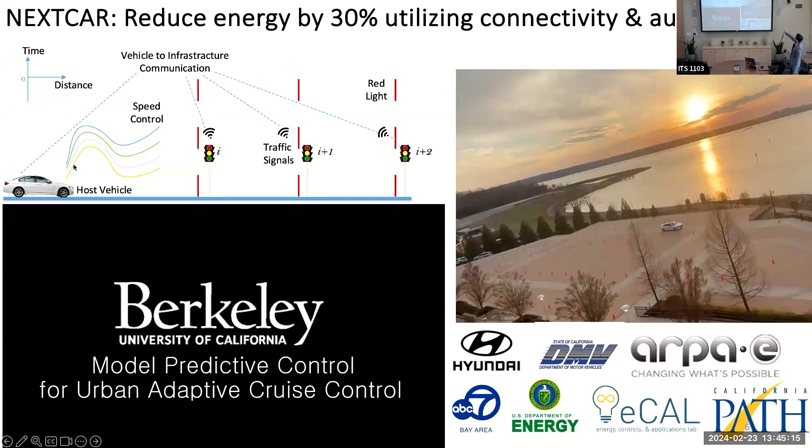So let me just mention a couple projects I won't discuss in detail because my research program has grown quite vast and I could talk about a lot of things. But I want to give you a sense of the breadth, and then we'll dive deep into some topics. So this project is sponsored by ARPA-E, the Advanced Research Projects Agency for Energy. And I bring it up because the goal is very relevant to our discussion. It's to reduce energy in vehicles by 30% by leveraging connectivity and autonomy. So connectivity means you have more information than you otherwise do. Autonomy means get rid of the driver's right foot, is my simple way of thinking about it.

So we have a number of demonstrations that we've done here, partnered with companies and so forth. The most illustrative demonstration is called eco-driving through signalized intersections. So the idea is as follows. If the intersections have connected to the traffic light controller some wireless communication, they can then transmit to the vehicles the signal phase and timing. That is, think of it as like a pedestrian crosswalk, where it gives you a countdown timer for how much longer you can pass through. So that, but wireless. And then the vehicle takes that information and then optimizes the speed trajectory to minimize energy consumption.

This isn't rocket science. You know what the optimal solution is to minimize energy? Ride a bicycle. But if you insist on driving a car from point A to point B, essentially it's drive at constant speed, right? If you're going to do so in some minimum amount of time, it's just you have these traffic lights that unfortunately make it more difficult. So that's essentially the game. And then let's see, this is also a video too. Let me just pass this forward.

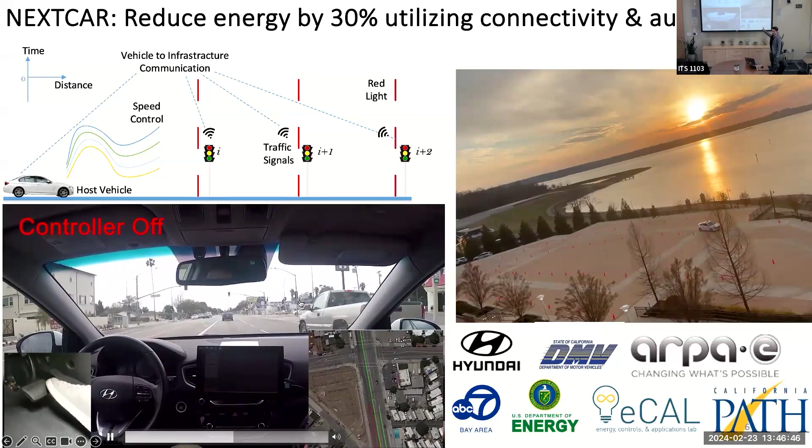So last year at the ARPA-E Summit, they asked us to do a demo of this, where we had participants at the ARPA-E Summit in Washington, D.C. come and ride in the car. So they often have people bring tech demos, but we were the flagship demonstration because it was like Disneyland. People could get in the car and experience it. And what we have here is our vehicle that's driving in an automated fashion.

And there's a virtual traffic light signal right up here. We couldn't bring a whole traffic light, of course, but you'll see the vehicle kind of pause. And then in the back seat, there was a virtual environment where the passenger could see the virtual signal. And actually, there were other vehicles that are going around in this loop.

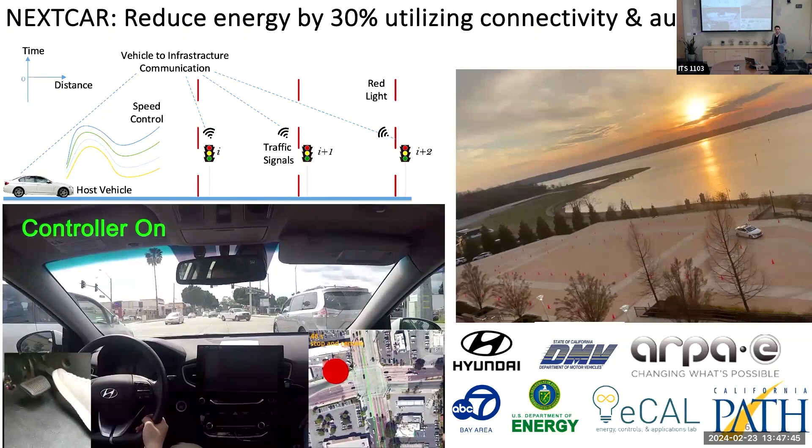So our students assembled this in like 3 weeks. They gave us a short period. They said, here's a bunch more money, just make it happen. 3 weeks, the car pauses and it goes. And then we want you to give several dozens of people, including government officials, rides in this thing so they could experience. UC students are amazing. So yeah, you can see a photo with all the students, Jennifer Granholm. So that was pretty cool.

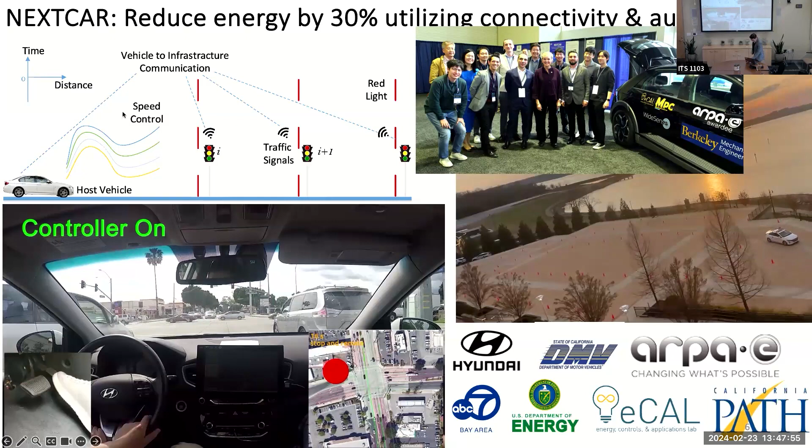Let me skip this and highlight this one. So this is a recent project from the UC Office of the President Climate Action Program. Some of you are probably familiar with this $100 million program that was stood up. So we partnered actually with Xinfan Lin here at UC Davis.

Any students at Xinfan?

No? Okay. And UC Merced and UC Santa Cruz. The question is, how do we evacuate communities in a world where there's 100% zero emission vehicles, where now the vehicle's fueling is much more coupled with a power infrastructure that could be more susceptible to outages in the event of an extreme event. So how do we think about evacuation planning? Could we do something about rethinking our infrastructure with some sort of backup generation or mobile power units?

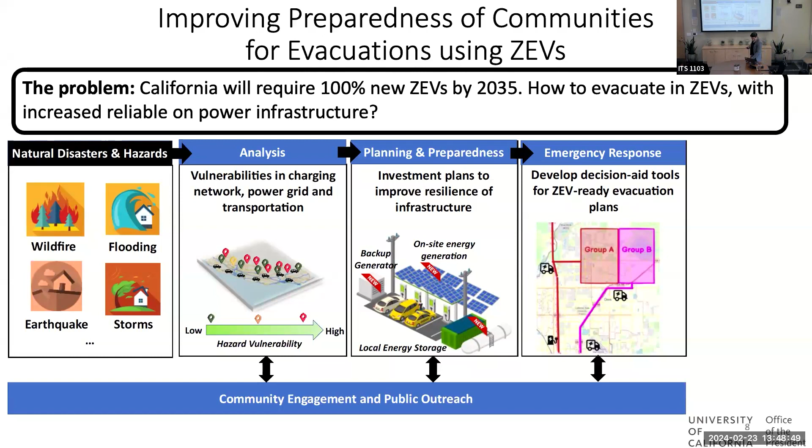So we're right in the middle of this project. But today, I'm going to give some background motivation for what I talk about in detail, which is SlrpEV, and I'll talk about innovative charging infrastructure options, namely Robochargers and battery swapping. So let me just dive right in. And first, I want to give context for why we care about all this. Like, what is the problem that we're interested in?

Xinfan just typed that they are online. Oh, they're online? Yeah. Okay, good. What's up, Xinfan?

So 51 billion. There's one number you remember from this presentation, it's 51B, because that is the tons of greenhouse gas emissions that are emitted annually, every single year. If we break that down into all these sectors, we can start to understand, if the goal is to send us to zero or net zero, what are the areas that are most important. Actually manufacturing, how we make stuff like cement, iron, and steel. Look how large that is.

We were talking about the importance of concrete before the seminar, right? So hugely influential for all the students in the room if you're still trying to identify research. The electricity sector, basically coal, to an extent natural gas, but getting rid of coal is important. Globally, transportation is only 16%.

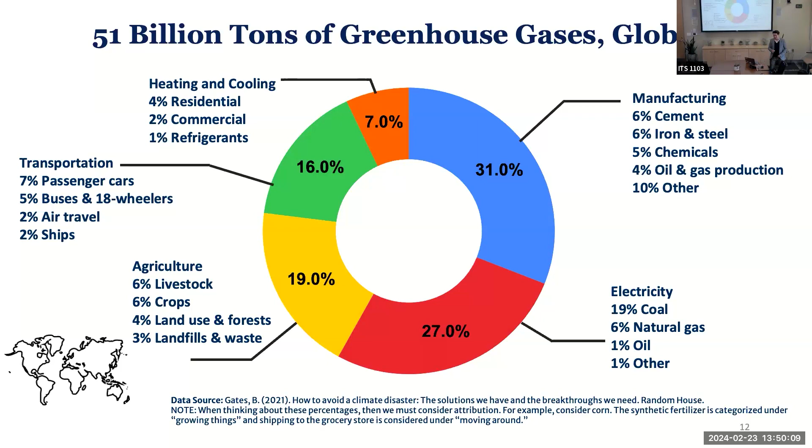Okay. But if we moved into more developed economies like California, where California is contributing 0.42 billion tons of greenhouse gas emissions, so about 1% of the world's greenhouse gas emissions is from within our state borders, okay? But in our developed economy, transportation is about 40%, and you can see how that breaks down into passenger vehicles, heavy-duty, aviation, et cetera. So this is why the state of California, in their policies, is being quite aggressive in trying to reduce the amount of greenhouse gas emissions in the transportation sector, because it is the biggest in the state.

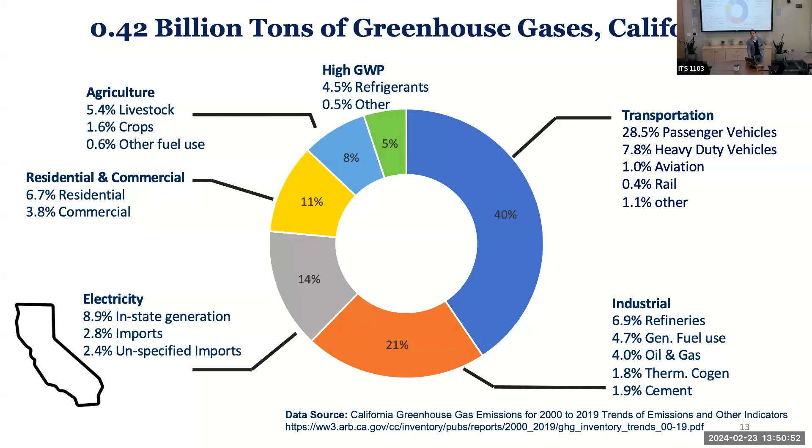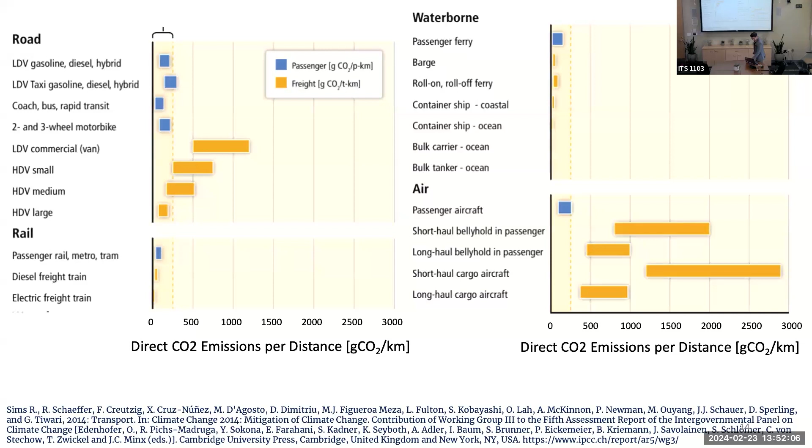All right. And I also want to talk about the duck curve. Anyone seen the duck curve before? Raise your hand. Probably half the audience, some that haven't. I love talking about the duck curve, so I'm glad to explain if you haven't seen it.

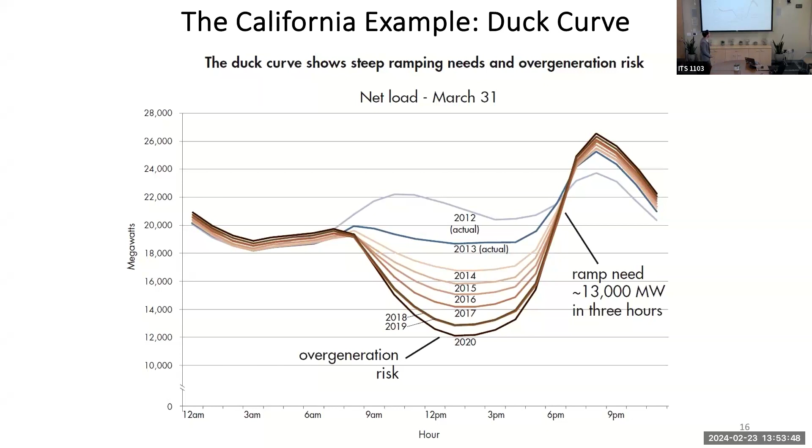For example, in this forecast of what might happen in 2020, thermal generators will need to ramp up 13,000 megawatts in 3 hours. The thing is that coal and nuclear, for example, as baseload generators, they don't change their power output quickly at all. But somehow the lights are on today, the year is 2024. So how are we doing this? We have achieved the goal of 33% renewables. We even surpassed it. And this is how it was achieved.

What happened between 2012 and now is the shale gas revolution. Natural gas is super cheap. We have much more natural gas, and that has been important to complement renewables, okay? Solar and natural gas are like PB&J for balancing the grid, right? Because natural gas can ramp up and down very quickly. But it's even more interesting than that.

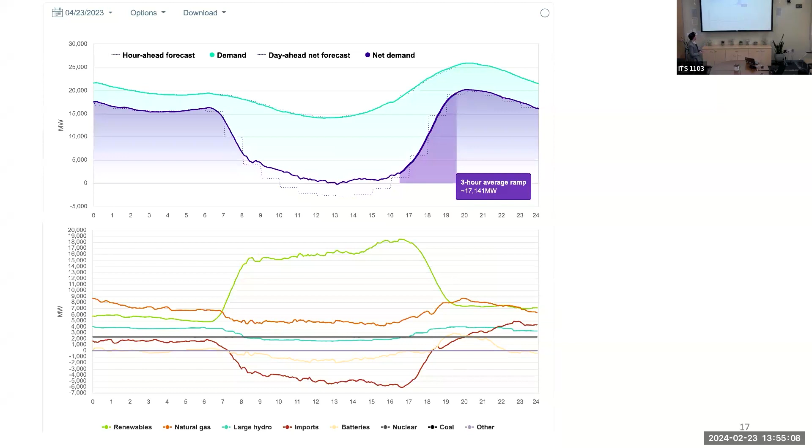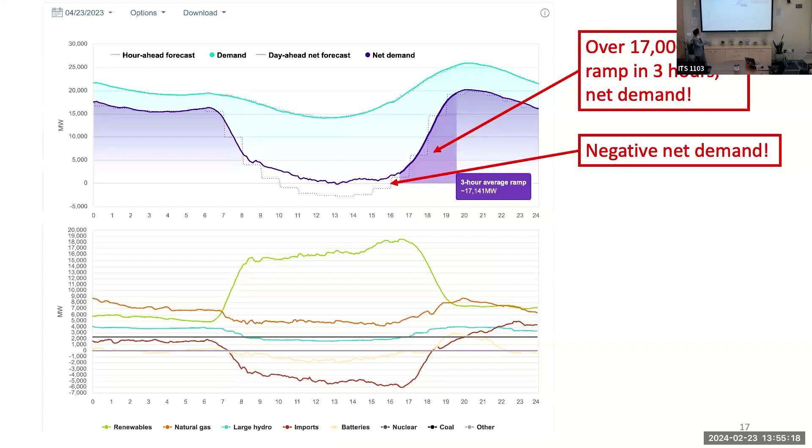So it turns out that in springtime in California, we have net negative demand, which means that we're generating more zero emissions energy than we can consume. And you can see that here. So if this weren't curtailed, you would have like a nice kind of diurnal bump here, but you can see it's like shaved off. We're literally curtailing, reducing the output of solar that we could otherwise generate because there's not enough demand in that moment.

Right? And here, we're basically exporting as much energy as possible and charging up batteries to the extent that they exist in California, and it's still not enough, right? In California, exporting energy is very rare. We are generally a net importer of energy, okay?

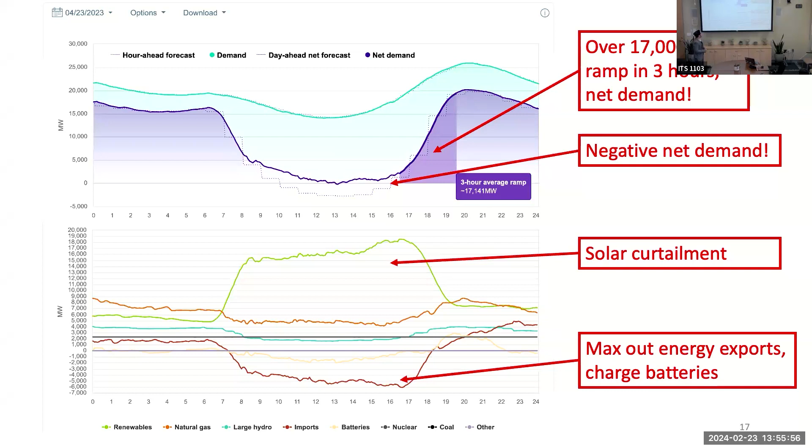Now, many of you are interested in transportation, so let's now throw electrifying the transportation sector on top of this. Okay, so we have this ramp in the evening, and now we're going to say, okay, let's electrify all vehicles. But the problem is the natural behavior is you go somewhere for work, you come home, you plug in, and note the charging would start when this ramp is occurring. Literally the worst time. It'll exacerbate the ramp, because of the natural behavior here.

So the key idea is, okay, if we can get some sort of flexibility in how these are controlled, then we can help balance this out. And there's also an emissions impact here because it turns out that the evening is the time of day that is worse in terms of total emissions on the grid, right? So if you're going to charge the vehicle, in terms of total emissions from electricity generation, the evening is the worst time. I felt a little bit bad because I charged up my EV and prepped to come here. I plugged it in at 8 p.m.

And I was like, not the best time to charge my vehicle. If I had done it in the middle of the day yesterday, that would have been better in terms of average emissions on the grid, but there it is.

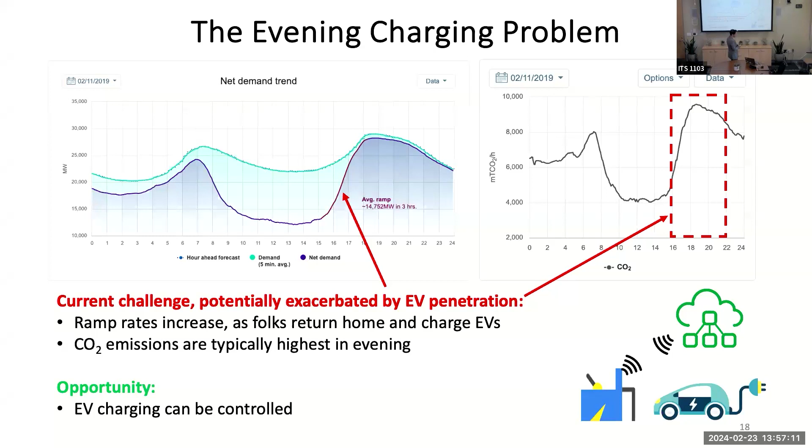Okay, so, behavior can help change this. And here's what I want people in California to do if possible, if I could control behavior. I want you to leave home with 30% charge in your EV. Anyone leave home with 30% charge in your phone? No? Yeah. Yeah, I do that too. I mean, you can charge at work, right? Like, do you guys have plugs at your desk? Yeah, you got plugs at your desk, right?

What if you had a plug for your car at work? And then you can charge in this time where emissions are least. And then when you come home, you're at 90%. You don't need to plug in at home. By the way, if it's your phone, the workplace is going to pay for it, right? Who pays for charging your EV? We'll get to that in a moment.

And it skews towards, like, me, college educated, white, I own my own place. It's a condo, actually, it's not a single family home, so I got those issues. But how do we provide transportation electrification to the second 50%? It's not happening naturally. And part of that I really want to emphasize is getting charging infrastructure to people's homes is super difficult. So this comes from another study from one of the national labs that I think is absolutely incredible.

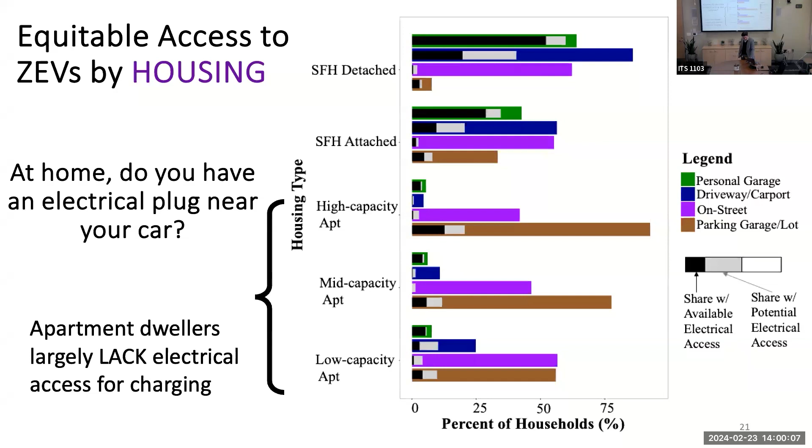And what this graph is showing is basically the black as a proportion of the colored bar is those that have electrical access. And then the gray is like, okay, if you did some sort of upgrade, then maybe you could get access. So there's a huge amount of people that are left out that don't have the easy convenience of charging at home. So that really leads towards SlrpEV, Smart Learning Research Pilot for EV Charging Stations. This is collaborative work with students Teng Zeng, Bertrand Travacca, Sangjae Bae, listed here in order. Tuba Ozturk is right here, and then Hassan Obiad.

So here's the goal: we're trying to create the next generation of workplace and public charging infrastructure to address all those problems that I just talked about. We want to decrease emissions. We need this to be economic for the facility operator, and we want this to be affordable to the EV drivers. And the key thing to remember is, there are many EV charging pilots across the country, across the world. Why is this one different? This one is different because we're not just optimizing power, the charging schedule, but we're optimizing the price of EV charging service by learning their preferences. Okay, that's the key. So humans are in the loop, and I'll explain in more detail.

So I think of this as a cyber, physical, and human system. Let me describe the cyber and physical components first. So physically, we have 8 level 2, so 6.6 kilowatt EV chargers, similar power to the ones on the backside here. There's 8 of them in a garage on the UC Berkeley campus. And the cyber infrastructure, let me describe it by how a user experiences it. So you park here, you scan a QR code, and that opens a browser on your phone, and you log into our system.

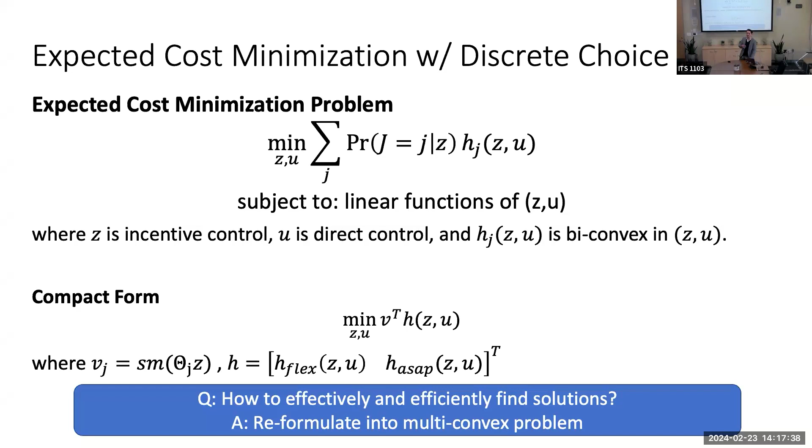Okay, I'm going to move on and talk about alternative ways to bring charging to vehicles with different forms of infrastructure. So I'll briefly talk about Robochargers. This is collaborative work with Yizhu and Teng Zhang and Zaid Ali Bokis, who's at Total Energies that helps support this project. So why am I talking about Robochargers? Here's the thing I've realized with SlrpEV is that there's huge challenges with fixed infrastructure.

First, people overstay, meaning they might plug in, start charging, but they stay parked there for many hours after they're done charging, thereby blocking the infrastructure for others, right? So that decreases utilization. The electrical infrastructure is really expensive.

While I was driving here, I was listening to a podcast about distribution transformers, and how there's a 2-year backlog. So if we want to build a lot of charging stations right here where we need a new transformer, apparently we won't be able to even get it going until 2 years from now because of supply chain. So can we get around the need for that? There's permitting, there's scalability.

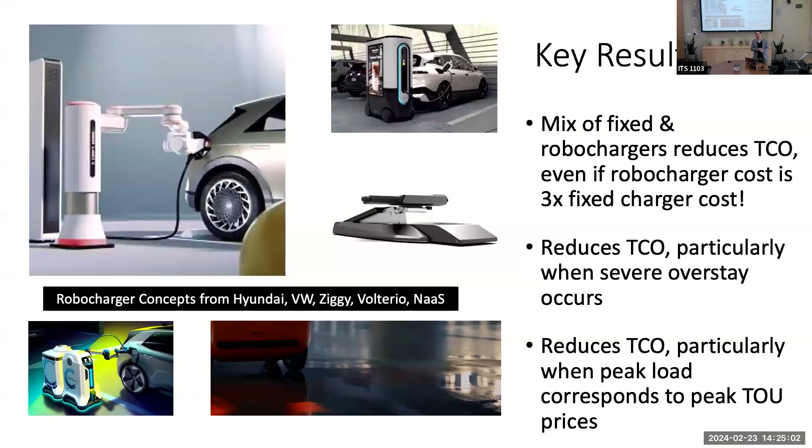Ideas like that are really good, right? I describe it as robo, but things around this area are what we need, the way you asked me to highlight challenges. So innovative solutions like that. If we can get rid of the human element, because of the cost concerns, that's a consideration as well. Let me move forward and go into battery swapping.

Gil Tal's not here. I know this, he gets excited about this. But he'll watch the recording, so he'll get to enjoy it later.

So, battery swapping. I want to focus on this. I showed this carbon emissions intensity, and at least for road transport, the most emissive mode is heavy duty freight movement, right? If we can decarbonize, make zero emissions one of those, it has an order of magnitude impact.

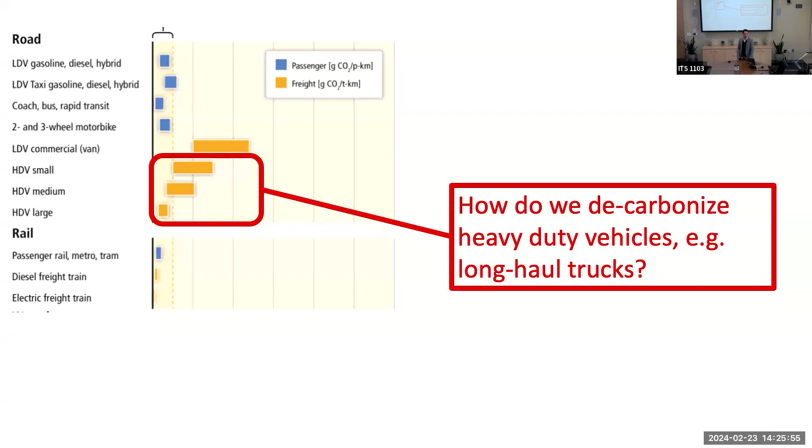Now, suppose I ask the question as simply as this: what is the fueling or powertrain option for heavy duty trucks that minimizes emissions? And I don't worry about the logistics of truck movement. So the answer is battery electric, conclusively, simply because of the energy conversion losses of creating hydrogen, even if we do so with green energy.

This actually was a figure from my colleague Nicolas Obrecht at Total, who looked at the carbon intensity of the electricity mix on grids. You can see this is annotated with different countries in Europe. The whole EU is about 200 grams of CO2 per kilowatt hour generated. France is super low carbon.

Anyone know why France is super low carbon in electricity? Yeah, they're heavily nuclear. Germany is much higher; although they started with the feed-in tariffs, they then had to rely on a lot of coal and gas. I think the worst European, it's not here, is Poland, which is dominant in coal.

So here you basically just have the conversion of generation of electricity to charging the trucks. But if you have to go through electrolysis, taking electricity, cracking H2O into H2 and O2, and then you take that H2 and put it through a fuel cell, you've got maybe a 45%, 40%, 35% conversion efficiency.

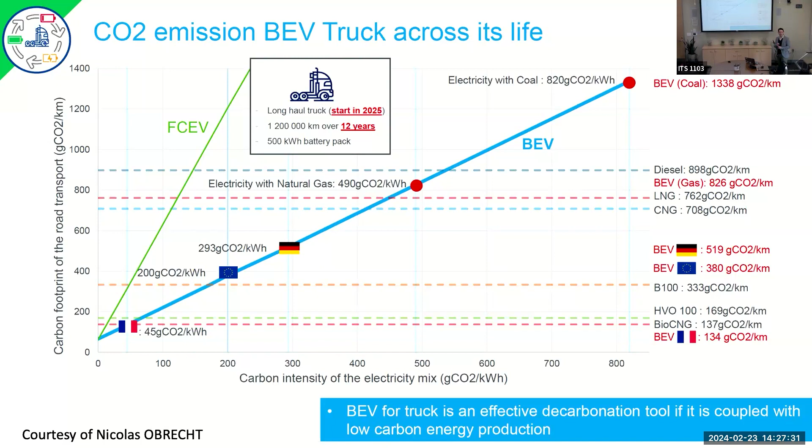It always loses, okay? Now, I'm not trying to go super hard against hydrogen and convince you battery electric is the silver bullet, but from an emissions point of view, it's clear that makes sense. The issue is range, right? That's the obvious issue you're probably thinking. So let's look at range for a sec.

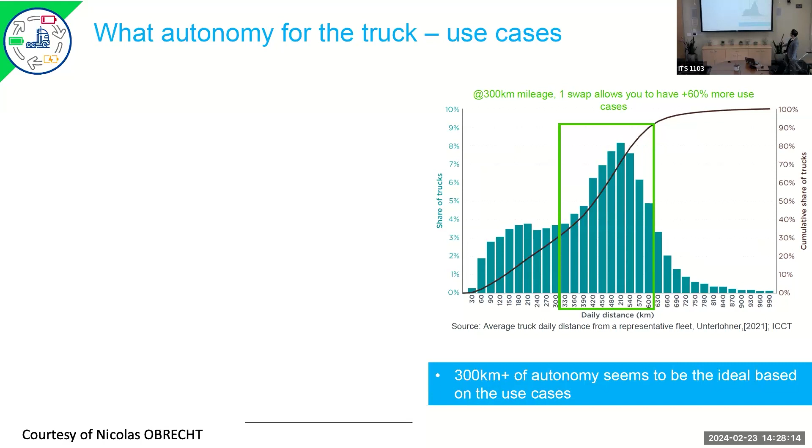Now, let's consider the idea that maybe you could swap the battery once during a day. This is showing, if I don't do a battery swap during the day, what percent can I decarbonize given the distance? They use the word autonomy; this is a language translation thing. And then if I do one swap per day, how much more of the trips can I cover? And if I do two swaps.

But at the same time, you have this facility with a whole bunch of batteries in it, and it's basically a battery storage system, which can then provide services in electricity markets. We talked about the duck curve, the need to absorb energy in the spring in the middle of the day. So you can sort of stack values, if you will.

So how would you operate such a thing? Because now you're providing a fueling type of service, and on the other side, you're participating in electricity markets. How would you operate all of this simultaneously? Could this make sense? Is there some scenario where it makes sense?

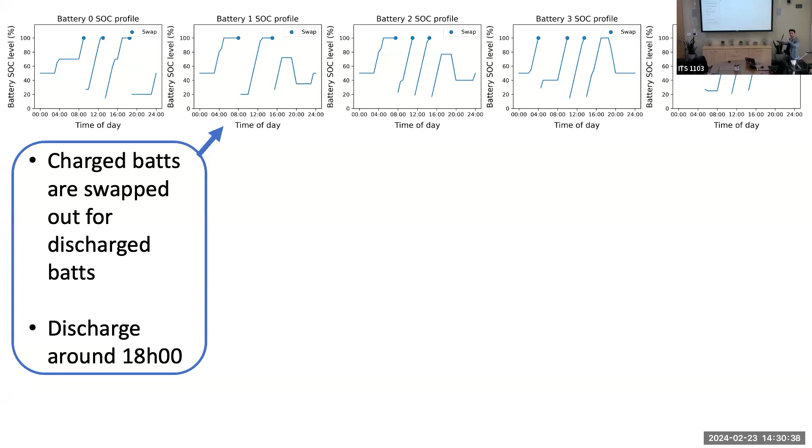This is actually a bay inside the swapping station. So you've got this battery, which could charge up, and then a truck comes and it swaps a discharged one, and then it charges back up, and so on and so forth. Meanwhile, at the end of the day, you can see it actually might discharge these batteries because there's some value in discharging to address this ramp issue that we talked about in the duck curve.

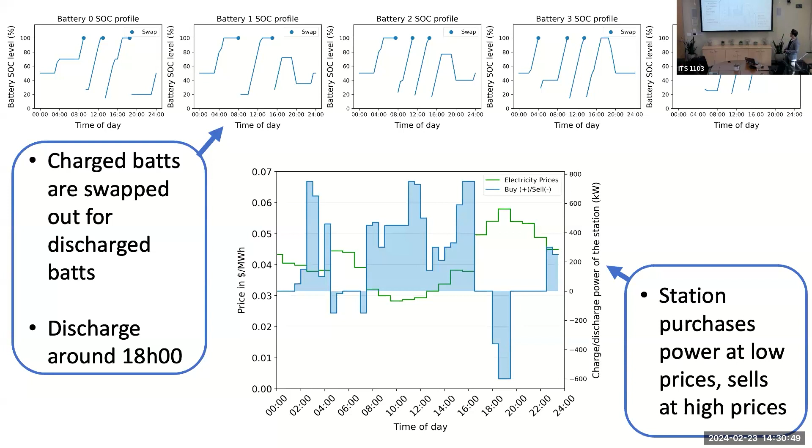So you can get this profile like this, where you can buy and sell electricity in the market, while in addition providing this swapping service. So just a flavor of some OR style problems here that combine electricity markets and transportation.

So I'll conclude here. Transportation in California is 40% of greenhouse gas emissions. There's equity and access challenges that get us thinking about some really nice intellectual challenges of how can we come up with innovative ideas. SlrpEV is one. We show that you can increase revenue by incorporating behavior to try to get flexibility. And then there's other ideas of charging infrastructure to help address issues with decarbonizing transportation.

I talked about Robochargers. I talked about battery swapping. We need a lot more of these innovative ideas that can help crack these difficult problems that I encourage you to think about. So with that, I'll stop.

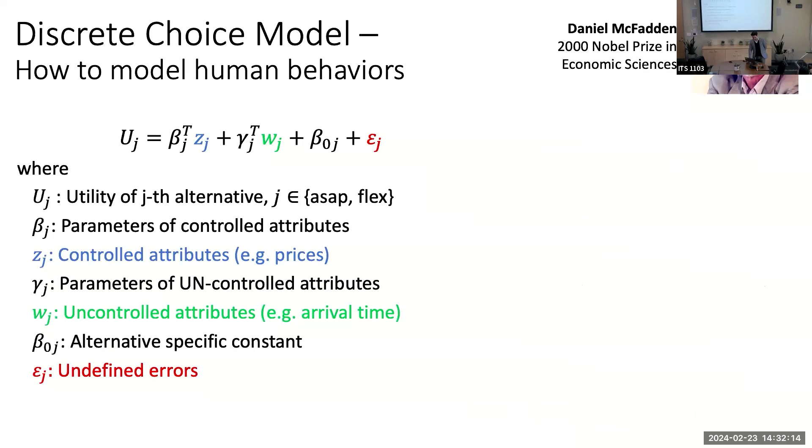And you can imagine that early EV adopters know a lot about batteries because they did a lot of research, but maybe the next quarter, like 75% of 50% of the population isn't going to know. Yeah, so let me repeat the question as I understood it: do we do anything to provide information to the participants on how to charge and improve their battery health? Namely, don't charge up to 100%. Yeah, or saying something like scheduled could be better for your battery health.

That's very interesting. The answer is we do not. We do not do anything in terms of informing them about their battery health. That's very interesting because if we did, that's maybe another signal that isn't strict price that might incentivize scheduled more. In particular, they may not need to charge to 100%, right? And if that reduces the charging time, we can get a little more flexibility. That's a really brilliant idea.

I'll tell you, we've got 279 unique users. I have all these anecdotes of people who literally just bought an EV last week and they don't have a way to charge it at home. And they're like, I know there's SlrpEV, and they sign up and then they contact me and they don't even know how to get the charger working, right? And to be fair, SlrpEV is a little more difficult to get working than normal because there's an app, and it's not like a Tesla supercharger or anything.

So it hits me that there's a big chunk of these users that are just new to this. And I think, how do we layer on information to them so they're not overloaded? Your idea is brilliant. I'd never thought about that. And I work a lot in batteries, and now I'm embarrassed. That's quite brilliant. Thank you.

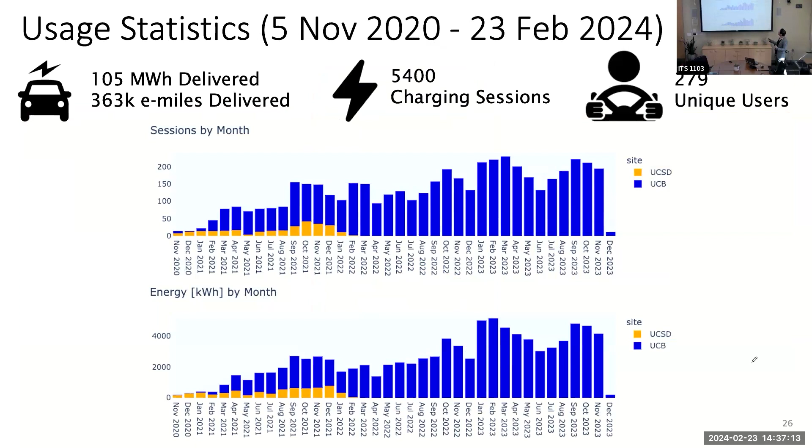So we have one power user. How many charging sessions do we have? Almost 500 of these are one person who has a Prius Prime plug-in. Oh, okay. And she arrives at like 5:30 and finishes at like 8. You know, and that's all she needs. And so basically that's all her.

And because she doesn't need much charge, optimizing doesn't make sense. If she picks the regular schedule, it'll do the same. Oh. So I think it's just anecdotal, a particular power user who happens to come in. Yeah. So this is all very interesting.

The fundamental thing that powers all of these is the arbitrage opportunity presented by the duck curve, right? And because that's there, you can invest capital now to get operational savings later. But those obviously compete against each other for that arbitrage opportunity. And now we live in a high interest rate environment. What are your thoughts on both the saturation and interest rate effects on whether these things are viable? Oh man, you gave me a whole macroeconomics question.

So the first thing I'll say is, here I'm fussing with shifting a little bit of power, doing arbitrage, like you're saying, between before 9 a.m. and after 9 a.m. It's not dramatic, right? Just getting people to charge at work is already putting the bulk of power in the middle of the day. You're mentioning the duck curve. Just getting them to charge in the middle of the day is getting them to charge at a time when the total emissions in the grid are least.

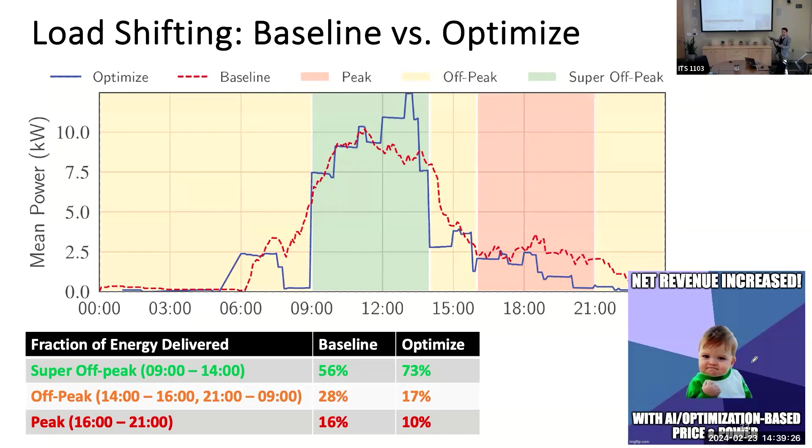And since you mentioned high interest rates, I think that does tie in with some other options. Some of these may be capital intensive. Some of these may be less capital intensive. We need other alternatives that have different risk profiles if you're trying to raise finance for infrastructure problems. This is almost more of a consumer electronics appliance type of solution as opposed to an installed infrastructure solution.

Yeah, I hope I somewhat addressed your question. Yeah, thank you. Cool. Hi, thank you for this interesting presentation.

I also have a question about the objective function in that program. You say it's to maximize revenue or profit. But wouldn't it make sense to be something more directly connected to welfare, like maybe maximize the kilowatts delivered, or the amount of clients or something like that? And do you think that would change the results?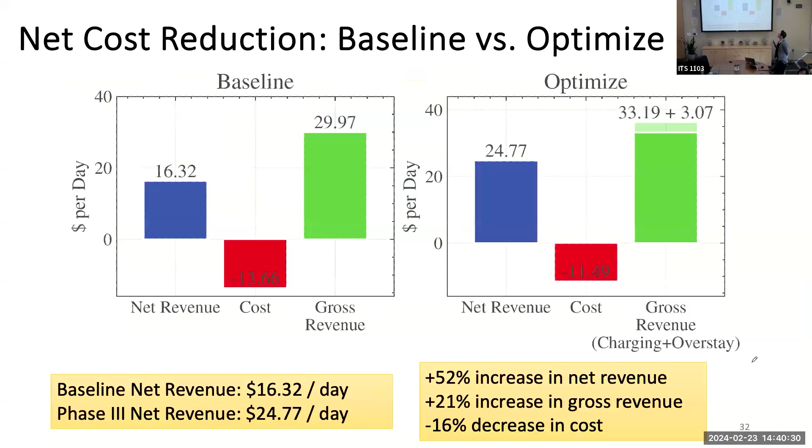Yeah, excellent question. Maybe this is best shown here. There's a bunch of errors here, excuse me. So you're pointing out we're optimizing from the perspective of the facility operator owner, right? And you're asking the question, what about social welfare? What about for the user? What about for emissions? This is illustrative.

We've done it for minimizing emissions. We've done it incorporating both the facility operator owner plus the user. So you can swap those in and out, and the nature of the solution certainly is different. To be totally honest, one of the funders of this project sees themselves as a facility operator owner. So they were pretty keen to do the physical experiments with this being optimized. That's why we illustrated that. But you make a great point, right? There's no reason you couldn't consider a different objective function here.

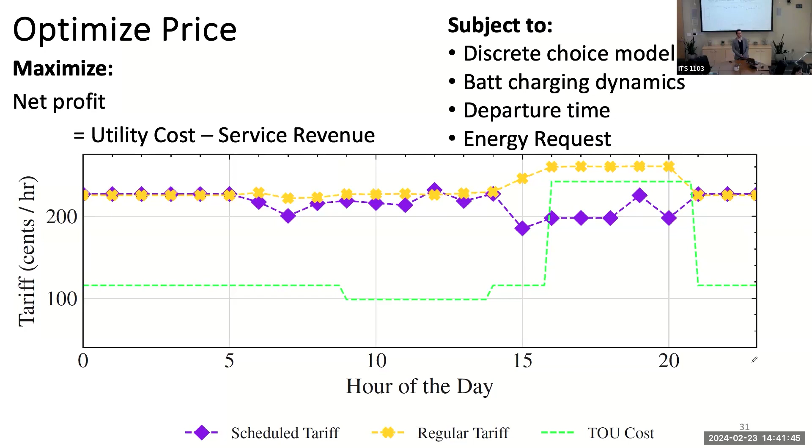Nevertheless, maybe you can appreciate that what I'm talking about brings flexibility. And so depending on the situation in that local region, you can consider, okay, what are the challenges and can flexibility assist? Great question.

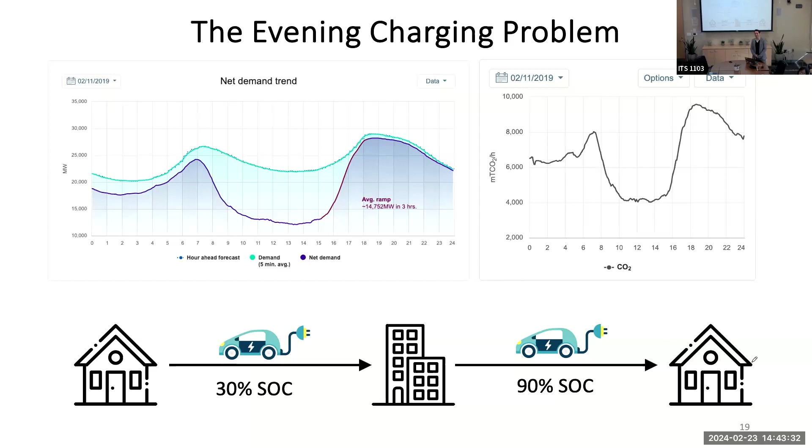For the battery swapping you talked about, how many batteries per truck do you estimate would be typical? They obviously cost a lot. They require a lot of raw materials. Yeah, I actually didn't put in the one key slide that is illustrative of that. Let me put this one up so we can look at it as we talk. We've done some sensitivity analyses on how many kilowatt hours of batteries you need to serve a fleet versus fixed batteries within the truck itself.

And we found that for long haul fleets, the total kilowatt hours of batteries you need is similar or more when you have battery swapping. In other words, you will potentially need to produce more batteries, or the same, right? That's roughly what we're seeing. So it doesn't seem to do a whole lot in terms of reducing the amount of batteries we need to manufacture and the critical materials we need to mine.

But there's another key factor that I really should have put up because it's a big talking point: if the goal with heavy duty trucks is moving goods over distance quickly, tons of goods times miles per hour, then battery swapping completely beats fixed chargers. Because with fixed chargers, you have to stop moving and charge. And over long distances, that really builds up. So that's where battery swapping has a ton of value, for long haul trucking. Let me say this another way: if we try to decarbonize long haul trucking, are we going to choke our supply chain by not allowing goods to move as quickly?

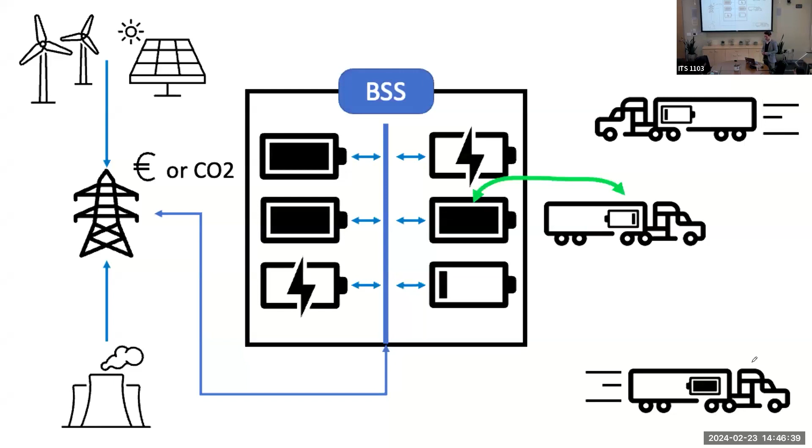Do we have questions from online? We do. We have a couple. So the first one is, why is the price in cost per hour, not cost per kilowatt hour?

Yeah. We did briefly discuss it. So if the price were given in just dollars per kilowatt hour, the issue is people would abuse it. Namely, there's this abuse problem where people could plug in, start a charging session, maybe immediately stop the charging from their car, and then they basically are getting that parking spot and they're blocking the charging session.

So in fact, there's two types of values here. There's a value for the electricity we deliver, and then there's a value to just the time at which they have access to the infrastructure. And those are two different things. So we collapsed all that into a dollars per hour. Actually, in our models, we have ways where we break that out. But the main concern is if we only gave it to them in dollars per kilowatt hour, then abuse will happen.

There's a lot of discussion on the best way to price EV charging. And I think for level 2 charging that we're talking about here, it's kind of a different thing than, say, DC fast charging. I wouldn't extend my conclusion immediately there, but that's the main reason. Yeah.

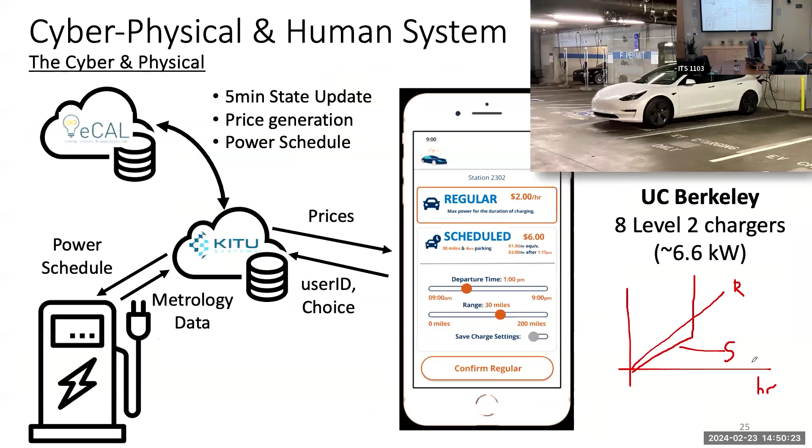Great. Okay. Next question is, how should charging infrastructure be balanced with efforts to reduce excess parking to facilitate more transit, walking, and bicycling? You would expect this sort of a question to come up in Davis. Of course, yeah.

No, I'll say, yeah. If we allow people to carpool, ride their bike, and there's more multimodal options, we don't have to worry about this. I 100% recognize that. I built this charging station on campus. I myself bought an EV. I can't charge at home. And you know what I do every day? I ride my bike, because that's clearly a better solution. So I totally agree.

Yeah, absolutely. A lot of great people at UC Davis are working on making more multimodal solutions possible. I certainly don't see this as a silver bullet. To the extent that people do need to drive, especially if, say in the Bay Area, housing prices are high, and if they have to live further away and there isn't good public transit, it's difficult. They might be relegated to cars. So we do need to find solutions there. But I agree with the spirit of the question.

Yeah, but as you earlier emphasized, for most challenging problems, we need a portfolio of different solutions and putting them together, and what you contributed here, even in a multimodal setting, would still be part of the solution, right? Absolutely. Yeah, they are not conflicting with each other. They're just complementary. Right.

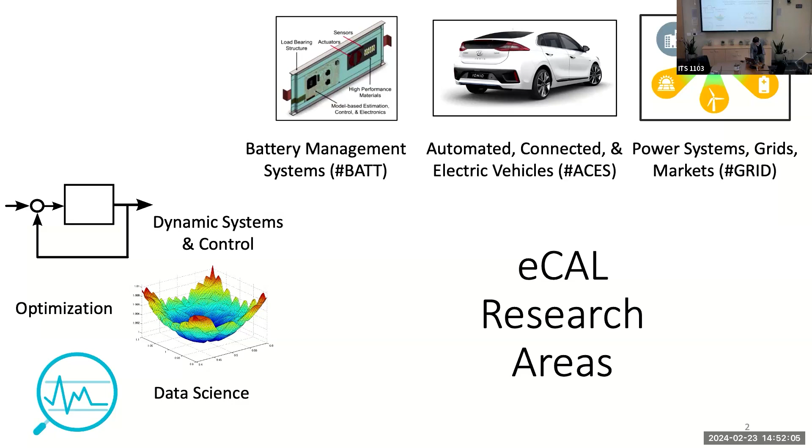And I also really appreciate that in the vision that you shared with us, there are new opportunities for business models, right? New business models that rarely come into the public infrastructure world. It used to be considered that the public sector takes care of all the infrastructure. But with these innovative solutions, individuals or small businesses could actually come here and be part of the solutions and make revenues for their own benefit. Absolutely. Thank you for that.

Thank you very much. Yeah, and you can imagine for some of the people in this room or listening online, whoa, startups can form around this, right? And there's a lot of opportunity to create new small businesses. Yeah, great time of opportunity.

More in chat. We have one more. How should battery swapping for heavy truck goods movement be balanced with rail transport? Oh, yeah. Rail, we haven't looked at that specific question, so I can't say anything intelligent. I'll say that rail transport, electrifying rail, it would seem to me that could be superior in a lot of respects. The key issue is building out the rail infrastructure.